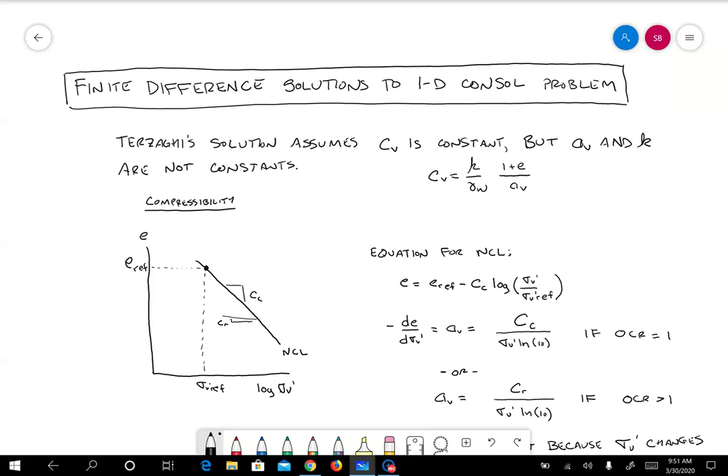So for compressibility, the a sub v constant, let's take a look here. We've got e versus log sigma v prime. And we have a normal consolidation line, NCL, that has a slope of C sub c and then an unload-reload line with a slope of C sub r. Let's just say, for example, that we're on the normal consolidation line and we have a reference point, e ref and sigma v prime ref.

That can be any point on the line. It's just that we need to know one point on the line in order to write the equation of the line. So here's the equation, right? e is equal to e ref minus Cc log of sigma v prime over sigma v prime ref. All right, now C sub c is a material constant, right? It does not evolve during consolidation.

And what we can do now is take the derivative, minus de d sigma v prime. And that's the definition of av, right? So we can compute a sub v easily. Right there, that's equal to av. And that comes out to be C sub c divided by sigma v prime times the natural log of 10. That's if OCR is 1, if we're along the normal consolidation line.

Or alternatively, you can just substitute Cr into that equation if you're over-consolidated and going along that line. So if OCR is greater than 1, a sub v is just Cr divided by sigma v prime natural log of 10. So even if C sub c or C sub r are material constants, and we're either staying normally consolidated or staying over-consolidated during a particular load stage, we see that a sub v is not constant, even under those loading conditions, because it depends on sigma v prime, which is a variable, right?

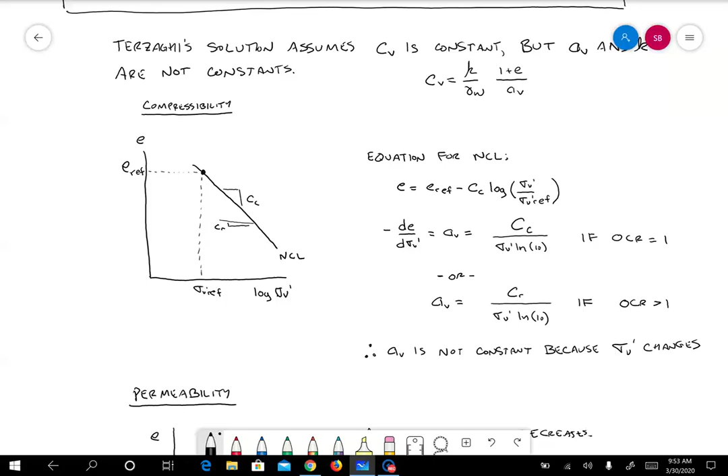Okay, and then of course there's another potential source of nonlinearity in a sub v. Let's imagine we start over-consolidated and then we come and turn the corner, right, say that this is at a particular depth within a layer, where maybe the OCR is 2, and then we come past the previous sigma p prime value and come down the normal consolidation line.

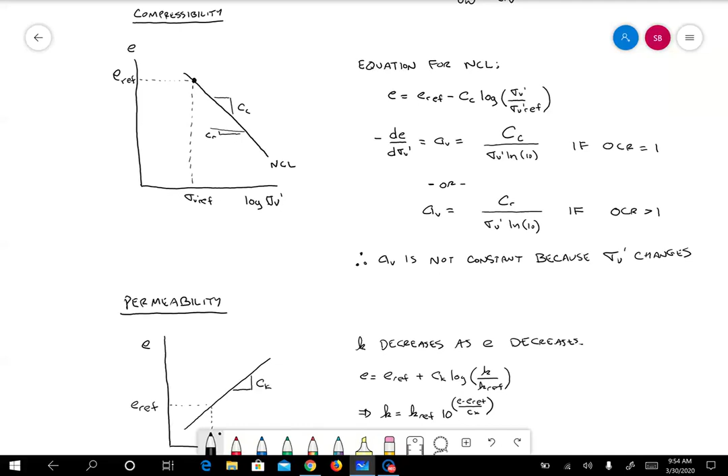Well, now, as loading progresses, a sub v starts according to this equation, and then it suddenly changes to this equation during loading. So that's another source of nonlinearity that is fairly complicated for us to try and handle, and certainly is difficult to incorporate into Terzaghi's 1D consolidation solution.

Okay, permeability, also not a constant. So people have done a lot of different permeability tests on different soil types and have found that the logarithm of permeability is approximately linearly proportional to void ratio, such that at low void ratio, the permeability is lower. Right, soil particles get closer together, the void space becomes smaller, and it's harder for water to flow through the

soil. So an equation for this type of behavior is e is equal to e_ref plus C_k times log of k over k_ref, where e_ref and k_ref are just, again, any point on this line, right? So we can define a line that gives us permeability.

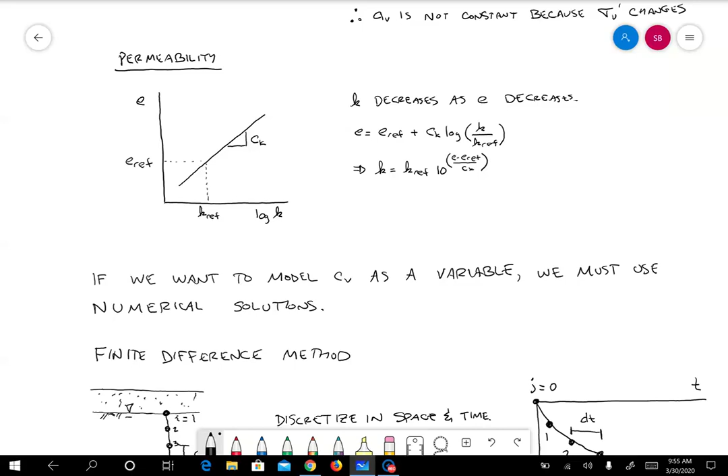So if we wanted to do a problem where compressibility and permeability change as loading progresses, we can't really use analytical solutions anymore because the differential equation becomes too complicated. So instead we switch to numerical solutions. And a solution that works pretty well for this problem is the finite difference method.

Pretty straightforward. I just wanted to go through and derive the equations for you here, just to show you kind of how easy it is to do this. It may seem a little scary to be doing a numerical solution and writing code and that kind of stuff, but I'll show you that you can actually do this using a spreadsheet solution if you want. My preference is to do a real code solution, but at least the forward Euler method can be done using a program like Microsoft Excel. So the calculations we're doing are not super complicated here.

All right, in the finite difference method, we have to discretize the layer in space and in time, both, right? So in space, we have some number of nodes. You can think of it as nodes and elements, although we're not really doing elements here since it's just a finite difference method. So here I'm using i as the index counter for the nodes in the depth dimension. So this would be 1, 2, 3, 4, and then you go all the way up to N, where capital N is the number of nodes that we've chosen to discretize the domain into.

Usually this is quite a few. We're not going to use 8 or 10 like we do for a solution of the amount of consolidation, because 8 or 10 just doesn't give us the accuracy we need to solve this problem numerically. So this would be tens or maybe hundreds, depending on the problem, of nodes.

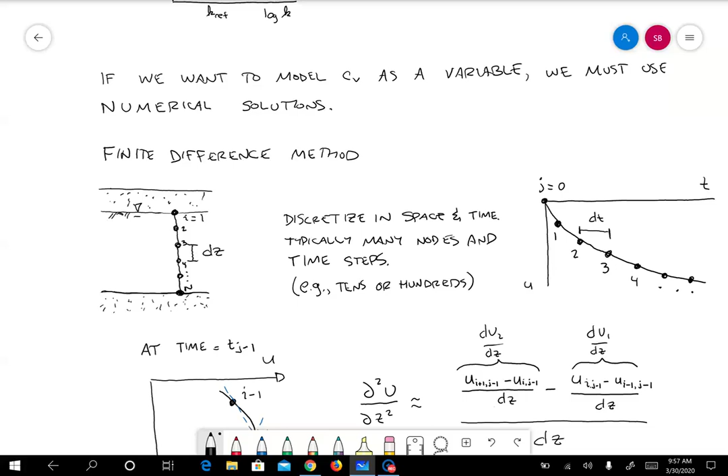All right, now here's how we do the finite difference solution. What we want to do is solve for the second derivative of u with respect to depth. So here I've sketched out a curve that might be just some kind of solution. It's a schematic. And we have different nodes. There's the i-1 node, there's the i node, and there's the i+1 node. And what we want to do is find the second derivative of this function at point i.

And the way we'll do that is to approximate it as the difference in slope. So this slope du/dz right here between i+1 and i, minus the slope from i to i-1, divided by the depth interval dz, right? So it's like the second derivative is the difference in first derivatives over the element length. So here's the equation for the approximation of the second derivative of u.

u of i+1, j-1 minus u of i, j-1. So that's this slope right there, right? And then, of course, divided by dz, which is that height. And then minus u of i, j-1 minus u of i-1, j-1, divided by dz. So it's that slope. This slope minus that slope divided by the element height.

So that's our approximation. And if we simplify terms, we get this expression for the second derivative, right? Pretty straightforward to derive this equation, very simple equation. Okay, notice that I'm using j-1 for the time vector.

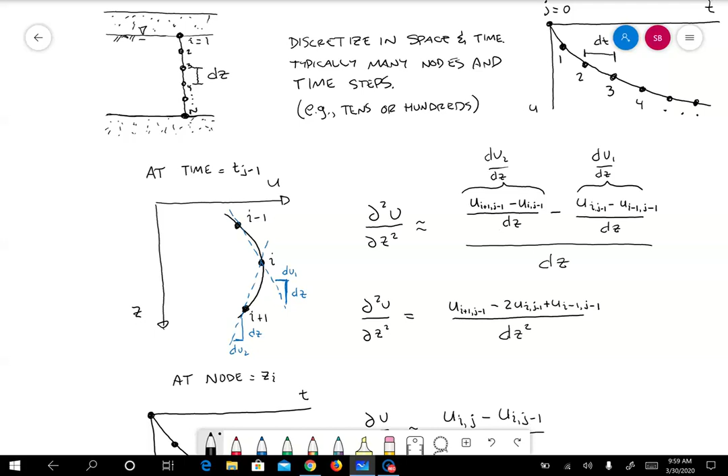Okay, so we're using j-1, which means that we have to know the very first time step, right? We have to know the initial condition. Then we can solve for what happens at time j equals 1, right? Time equals dt. Okay, now let's go on to the discretization in time, which is actually even easier than the one in space because it only involves a first derivative instead of a second derivative.

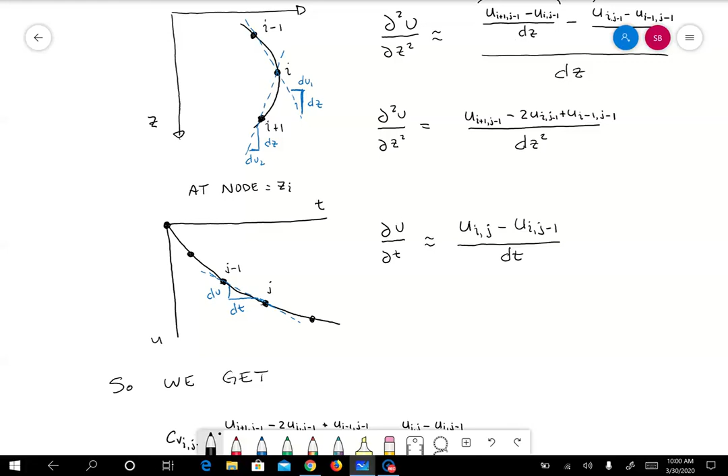So here we see there's a slope du/dt between time j and time j-1. So du/dt is approximated as u of i comma j minus u of i comma j-1, right? So this is at some node z_i, right? Whereas up here, this was at time t j-1. So that's how we've chosen to formulate this problem.

All right, so we end up getting C sub v, and this is C sub v at a particular node at time j minus 1, right? So we're allowing for the possibility that C sub v may change as a function of depth and time here. It could just be a constant, in which case we could technically get rid of the index values, but we'll assume that it's a variable. So C sub v times the second derivative of u with respect to z is equal to du/dt. And now everything is j minus 1 except for this term right there.

So we can isolate that term and we get u of i,j is equal to C sub v i,j minus 1 dt over dz squared. And then we have the second derivative terms there, and then the previous value of pore pressure at time j minus 1 here. So this term gets added on to that term.

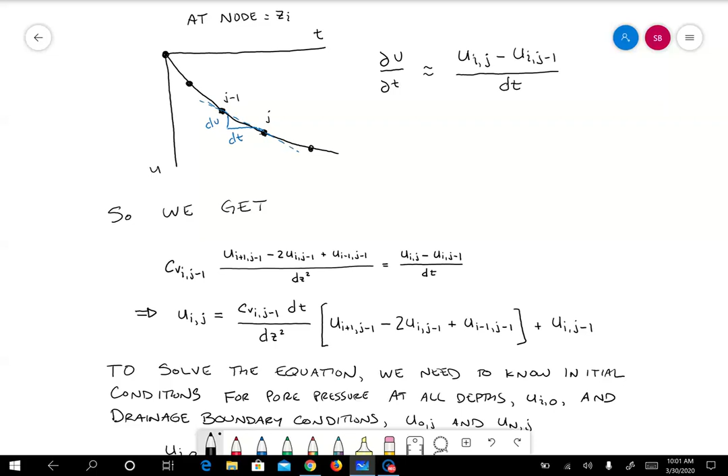Okay, now here's the initial conditions, right? Since we're having a j minus 1 appear in a lot of places, we can't use this equation to solve it for j equals 0, right? For that very first time step. We just have to know that as a boundary condition or as an initial condition. So here's the boundary conditions we need to know to solve this problem.

Okay, first of all, u of i comma 0. These are the values at time equals 0, equal to delta sigma v, right? Or du. We're assuming that the change in vertical total stress is equal to the change in pore pressure. So at time 0, all of them are equal to delta sigma v. And then we also know, because of drainage boundary conditions, that the top node always has 0 pore pressure, and the bottom node always has 0 pore pressure, right? Those are the drainage boundary conditions. This is the initial condition.

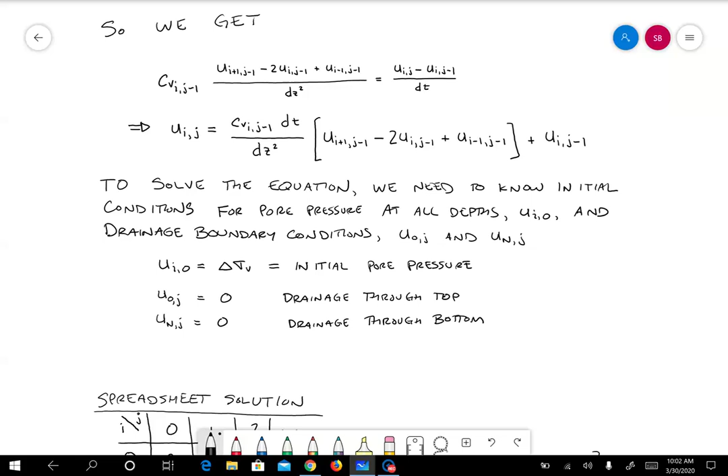Okay, now let's look at what we could do if we wanted to solve this using a spreadsheet solution like in Microsoft Excel or something like that. Well, the first thing we could do is create a row for all of the time steps and a column for all of the depth intervals. So this is going to be a pretty big table, right? Because maybe we have 100 depth intervals and maybe we have 1,000 time steps or something like that.

Well, then we can put in the first column, right? Because we know that the first column involves zeros at the top because of the drainage boundary conditions, and then delta sigma v's everywhere else until you get to the very bottom where it's again 0. So again, that first column is 0, delta sigma v all the way down, and then 0 again at the very end. Then we go to the next time step 1, and now this is where we're using our equation.

Okay, again, we know that 0 has to be the pore pressure at the top and at the bottom, and then all these other cells in column 1 we can calculate using our finite difference equation. So u of 1,1 is equal to cv at 1,0 dt over dz squared. And then we have the value u2,0, so we're using this value, minus 2 times u of 1,0, which is that value, plus u of 0,0, that value, plus the initial value here, the previous value there, delta sigma v.

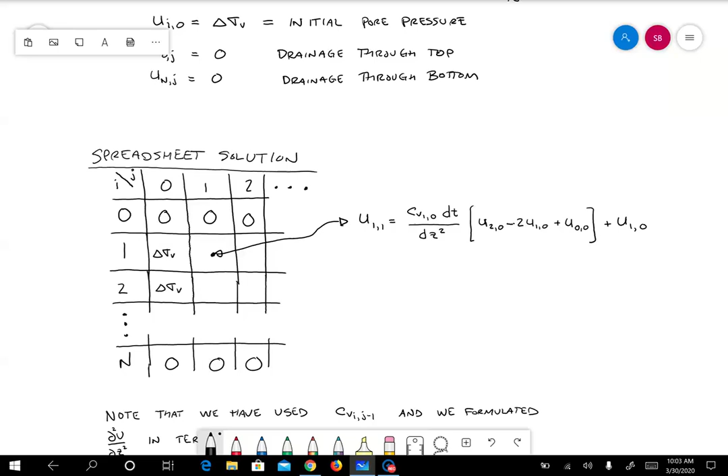Okay, so you can just drag that down, and then you go and do this one, and you're going to be using column 1 now to compute values in column 2. So you can just march along and do this thing, kind of drag and drop, no problem.

Okay, now let's talk about this. We have used CV of i,j minus 1, and we formulated the second derivative of pore pressure with respect to depth in terms of the j minus 1 time step. That means that we've been using the forward Euler method. In other words, we're going to project the next time step based on the values at the current time step. That's an explicit method because we were able to get an explicit equation for u of i,j.

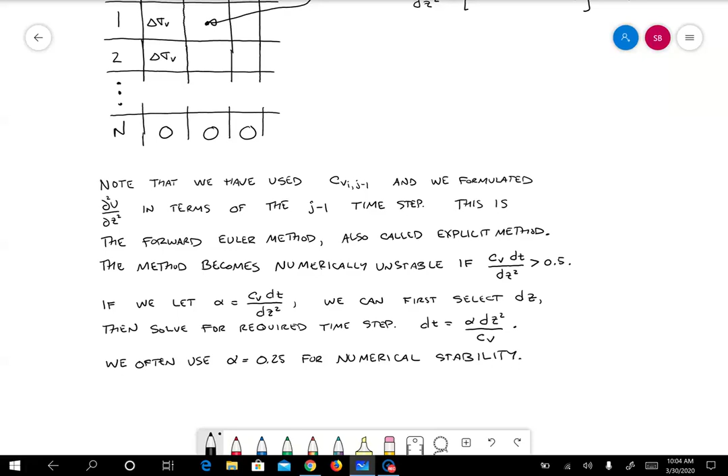Now, this method becomes numerically unstable if we exceed a certain ratio of CV dt over dz squared. Okay, if this value becomes larger than a half, the solution will become numerically unstable. And I think we can kind of see why that might be the case if we're approximating some curve like this, right? And let's say that we're going from here to there, and that's the actual solution. I'm not labeling the axes here because it doesn't really matter. This is just a concept.

Okay, if that was the actual solution, the forward Euler solution would give us is that we would use this slope, right? And we would approximate the solution as being right there. So that this distance is an error, epsilon. And then we would evaluate the gradient at this point, and the next slope would be this way. And so we're gradually walking away from the actual solution, and those errors accumulate as they go. And then you can end up with some kind of non-physical answer if these errors become too big.

So in order to keep the errors small so that the forward Euler method is stable, we have to keep this ratio, CV dt over dz squared, less than 0.5. So let's call that variable alpha. A lot of the time it's called alpha, CV dt over dz squared. So the way you would do this problem to ensure numerical stability is that you wouldn't independently specify dz and dt because you might pick a combination that violates this ratio requirement for alpha.

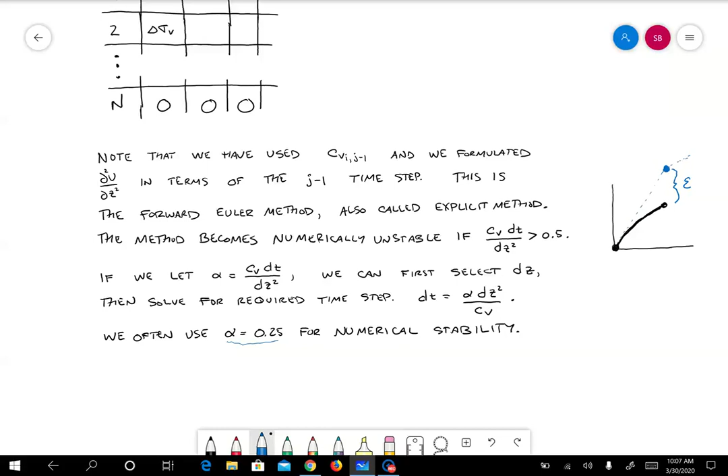We will go to the backward Euler method in the next video. That's where you use the slope at the end of the time step rather than the beginning of the time step to march through the solution. It is unconditionally stable, so you always get numerically reasonable results. But in general, whether you're using forward Euler or backward Euler, solutions become more accurate as you decrease the vertical spacing and as you decrease the spacing in time. So we want to be careful about picking enough depth intervals to get a reasonable solution.